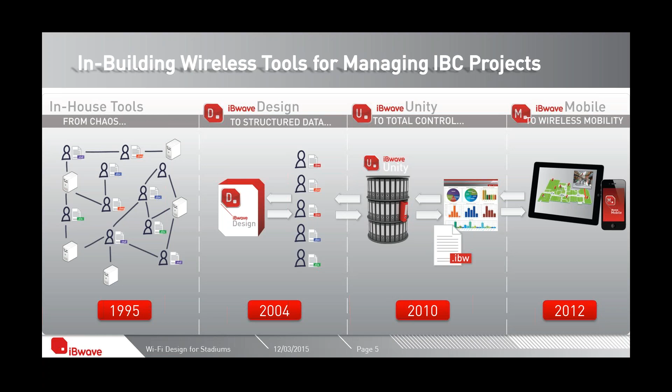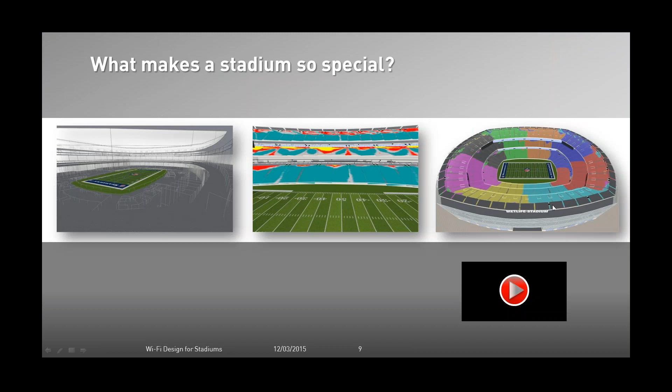We have Wi-Fi for stadiums as our topic. Let's have a quick look at what makes a stadium so special that we hold a webinar about this.

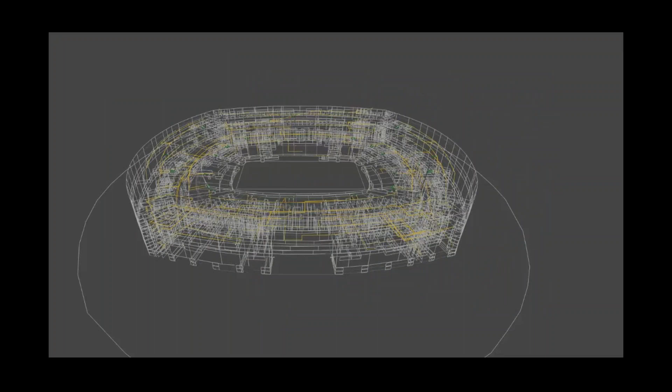Here is an example, and what we see is, to start with, the 3D structure of a stadium. A stadium is not a normal building where I have maybe one riser going from the very bottom floor to the very top floor. Typically in a normal building, I only have horizontal surfaces, being my ceiling, and vertical surfaces, my walls.

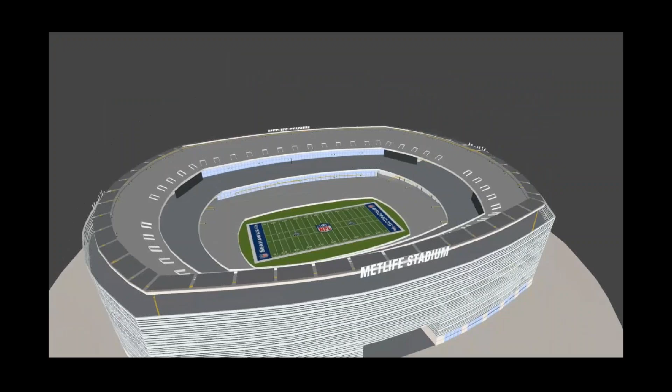But in a stadium, I also have the seating area, which is a bit similar to an inclined surface, basically what we see here. On top of that, in a stadium, we have a playing field. That's also something not very typical for a normal building. All this makes it very, very specific.

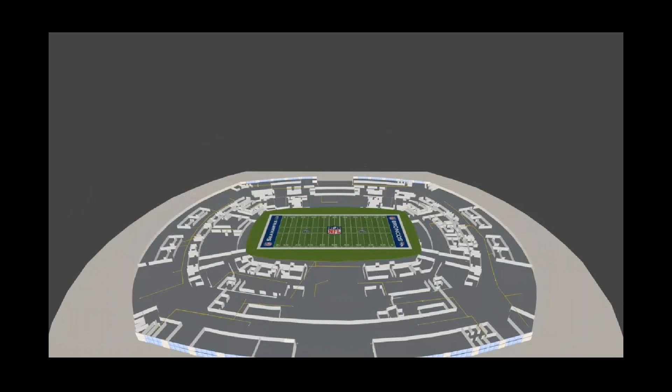And even in this stadium, you might see these yellow lines - I might want to see where my cables are running. I will want to see where I have my antennas and all this information.

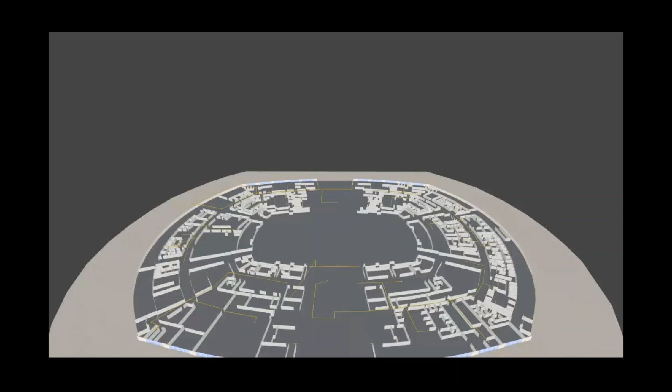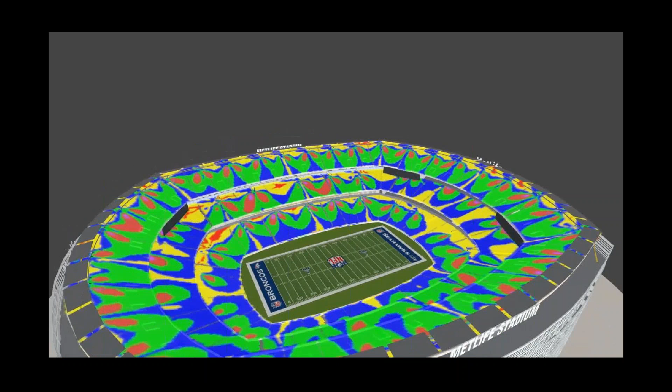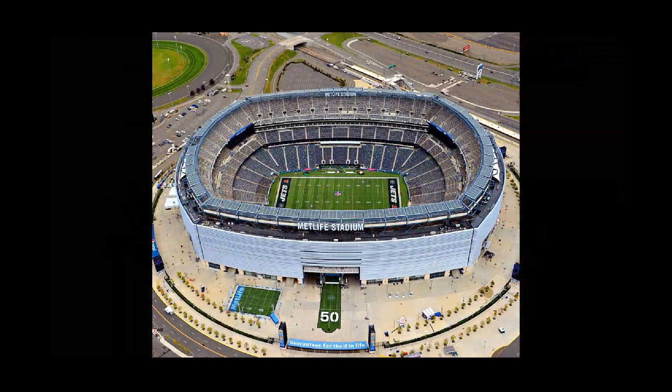That's one thing that makes a stadium so special, but there are other reasons as well. One of them is that we really have a mix of communities with different needs.

Who is it that goes into a stadium? First of all and foremost, we have the visitors, and this is the big crowd. What are they doing? They're taking pictures. They want to upload pictures to Facebook or whatever and say, wow, look at this, here I am, and this is the concert, or this is the soccer or football game.

If it's a football game, they maybe even want to see how other teams are doing to compare it, so they want to download this information. Another crowd we have in a stadium is the operations team of the stadium. These are typically the people who show us our way and help us with things, and they also need communication systems and data online.

Not necessarily do the visitors and the stadium operations have the same requirements, so we have to plan differently for that. On top of that, we can have event personnel - just imagine if there is a rock concert in a stadium, the organizer will bring his own people into this stadium, and again these guys need to communicate, they need to have data available.

And then on top of that, we have the press, we have the security people. So that really shows us it's not just someone who goes into a stadium - there are different people, different communities, and they have different needs.

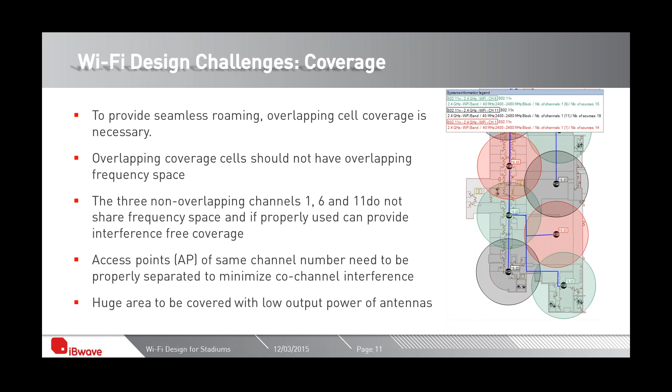So with that in mind, let's move on to the next challenge, which is capacity. If we talk about capacity, I have to ask the question, how many access points do I need for a given number of users? Or maybe in other words, how many users can I cover with one access point? And how many do I need for the complete stadium?

Well, also one important aspect is, what do users expect? So what is their usage behavior? Are they just looking at their emails every 30 minutes? Or do they want to download and look at videos and things like that?

That really changes these calculations that we have to perform here. So I'm just going through an example where we say, let's assume we have 500 kilobits per second per user. This is what the user eats in bandwidth, if you will. This is what he requires to have proper video streaming and so on.

Let's say we're using 802.11g, and we're aiming for a 10 megabits per second cell edge or coverage edge. This depends on signal-to-noise and interference ratio, but let's just assume we can achieve that for now. Now let's assume that 25% of our users have Wi-Fi enabled devices, and let's also assume that 25% of the users are using it at a time, because most likely not everybody is using his device all the time. So these are just assumptions.

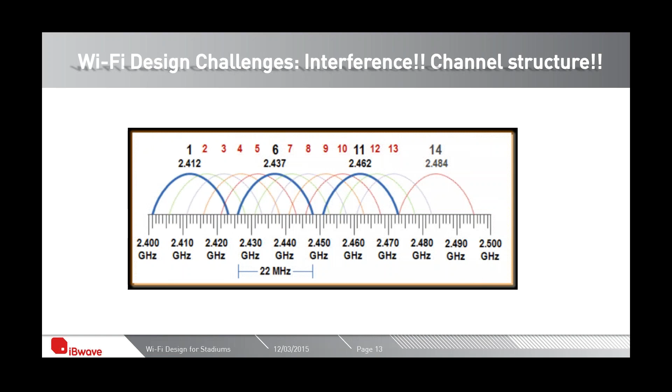And when we talk about interference in Wi-Fi, well, it's almost for everything, but on the 2.4 gigahertz band, we have to look into adjacent channel interference, and this is what I just mentioned, that channel 1 and channel 2 have a lot of common frequency band, and therefore they will interfere with each other.

And one thing we must not forget when we talk about Wi-Fi, it's an unlicensed spectrum. That means almost everybody can do almost everything. Of course, there are, even for this band, regulations. But if someone decides to create a Bluetooth headset and use it, if someone decides to use his microwave oven, which is very, very close to this spectrum, if someone decides to use a DECT phone in this frequency, so basically a wireless landline phone, if I may say so, everybody can do that in this frequency band.

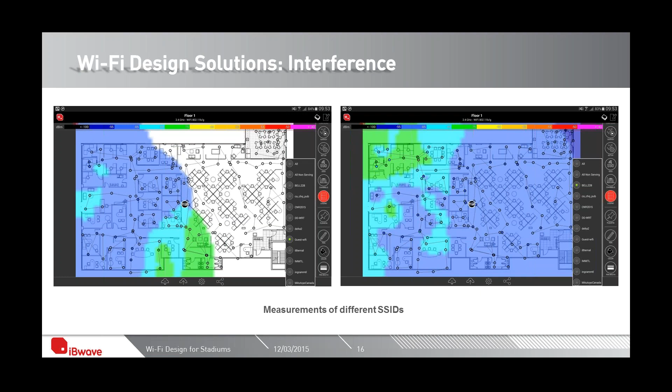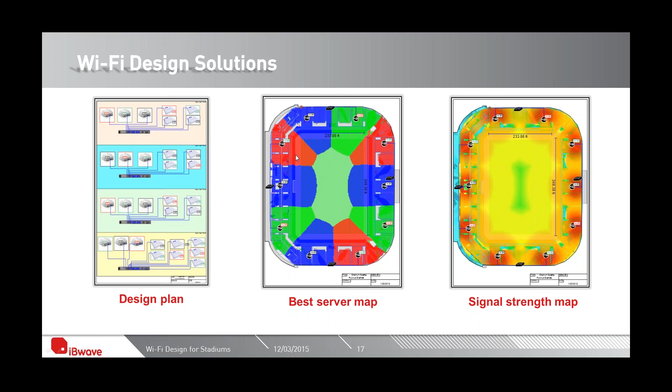And this is really something that I want to see, a nice separation between them. And of course there is some overlap in signal strength, but here it is more important to see the structure, which access point is covering which area, and this is what we just call best server map. Now I've talked about access points. What do I need to know about these access points?

Well, what is important is, first of all, which band I'm working in. Is it the 2.4 gigahertz band? Is it the 5 gigahertz? And there are some other bands or frequency bands planned. Then, what is also important, I need to know which technology I'm working in. Is it 802.11bg as indicated here? Is it 802.11n, or is it 802.11ac, which is one of the later standards?

And also important, the channel. And here we see again our 1, and if I would scroll down here, 6, 11. So this already allows me to define my access point if I use it. And what is also important when I talk about the access point is that maybe I already want to use a certain model from a certain manufacturer, and what is for sure important is the output power. And here, for instance, we see 20 dBm. And then, of course, it depends whether the access point already has an integrated antenna or I need an external antenna. So just things like that.

And if I plan my system then with these access points, knowing which frequency, knowing which technology, knowing which channel, knowing which output power, knowing which antenna, then I can go back and do my coverage. This is again an example that we see here. Signal strength, that's basically the coverage. And here on this one, we also have a legend that shows us again which color corresponds to which signal level. And for the same area, what I see here is again my best server map. So before it was a seating area. This is now aside the stadium in the concession area.

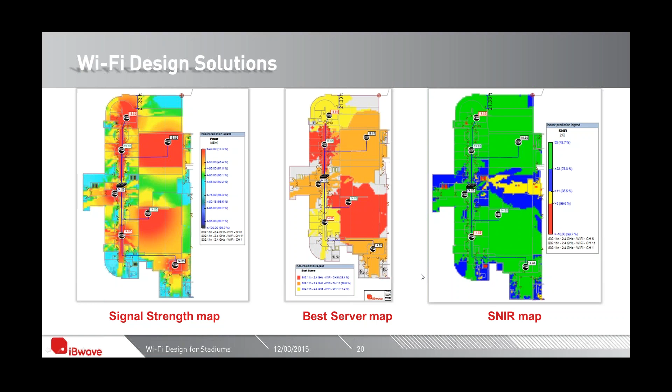One thing that is key: we did our calculation in the beginning where we said, okay, I need a certain amount of access points for the amount of people that I have, or the other way around. But when we did that calculation, we were assuming a few things. And one of the things that we were assuming is the cell edge data throughput, or let's say the average data throughput that I can achieve with an access point. In our example, it was the 10 megabits per second.

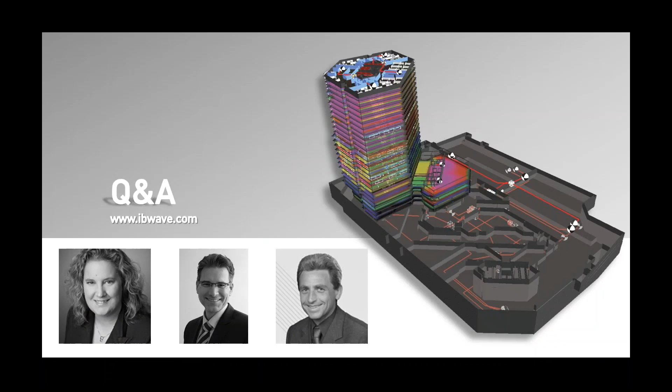How can I include measurements of existing RF signal on inclined areas for SNIR calculation? Peter. Okay, well, that's a good question. Basically, if we look at Wi-Fi only, we at iBwave do have a tool that allows us to do walk tests. And with these walk tests, we can measure the RSSI from different SSIDs, and we can then filter it according to the channels and the SSIDs and so on.

And we can do this on the inclined surface, on the seating area, and because what I just described is mobile, it has the same language as Design, so I can simply bring the file into iBwave Design, and then I can do SNIR measurements.

If it is for, let's say, not Wi-Fi related things that I cannot control, which I would say is the minority, here I would need to do a quick check with the spectrum analyzer, and also this is something I could address in iBwave Design.